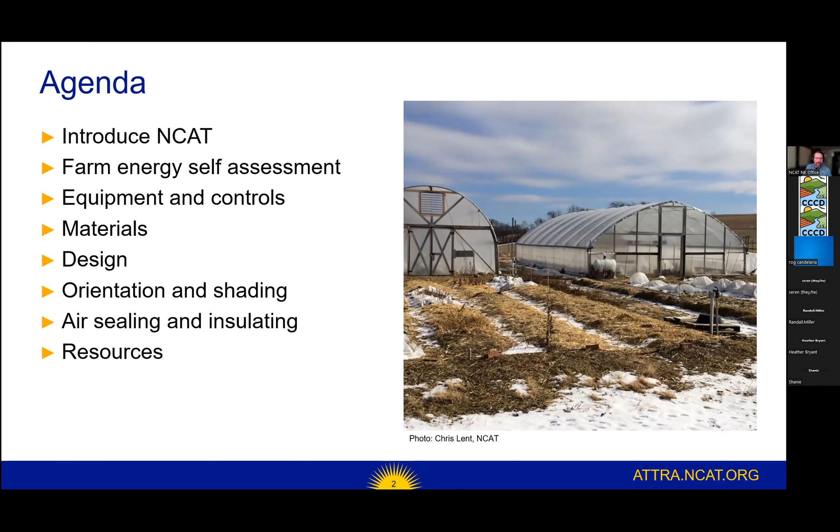And then we'll finish with some air sealing and insulating information for those structures. Throughout, I'm going to have resources for you, hopefully, that you can turn to dig a little bit deeper into the subject matter we're going to be covering. So without waiting here, we're going to go forward to talk just a touch on NCAT.

The National Center for Appropriate Technology was formed back in the late 1970s, so we've been around for quite a while, and we were formed to help folks during the energy crisis of that time. We adopted the principles from the appropriate technology movement, which were small scale, simple, local and low cost, and environmentally sound. We still use those principles in our programming today.

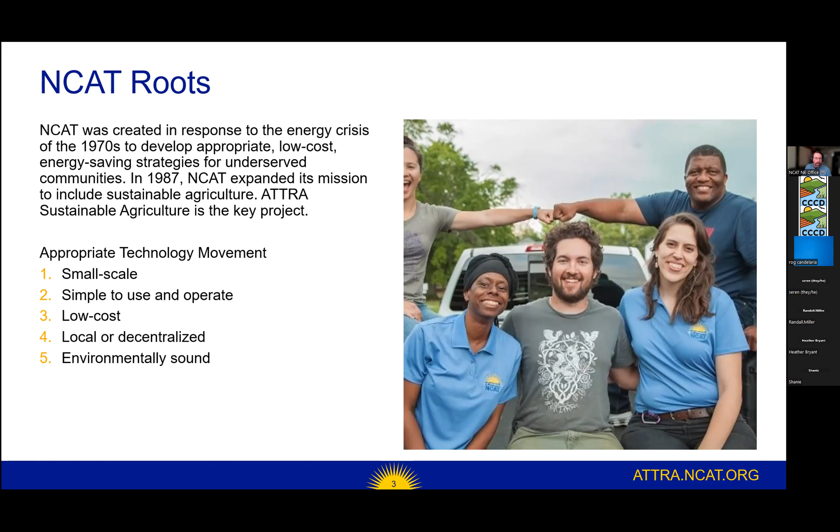There's two main sides to our work at NCAT. One is agriculture, and we do that mostly through our ATTRA project, formed in the mid-'80s. Through ATTRA, we have over 300 publications available. We offer technical assistance from our specialists across the country, one-on-one. There's podcasts, tutorials, video logs, and all types of information on sustainable agriculture subject matter that you can access through our website, which is in the lower corner of the slides. Each slide has our ATTRA website on it.

The other side of what we work on is energy. We do energy audits and energy assistance for folks across the country as well. I'm here to talk about both of those things, bringing them together to talk about energy efficiencies in high tunnels and greenhouses.

What we wanted to target today, or who we wanted to target, were folks who have a smaller diversified vegetable operation and grow some of their own seedling starts in the propagation house. They possibly have a high tunnel or two that's heated, along with a small greenhouse for propagation of seedlings, and maybe to grow some starting plants for other farms in the area. That's kind of how I organized the talk today, around that type of grower. But I think there'll be information in here for those who are bigger than that and those who are smaller.

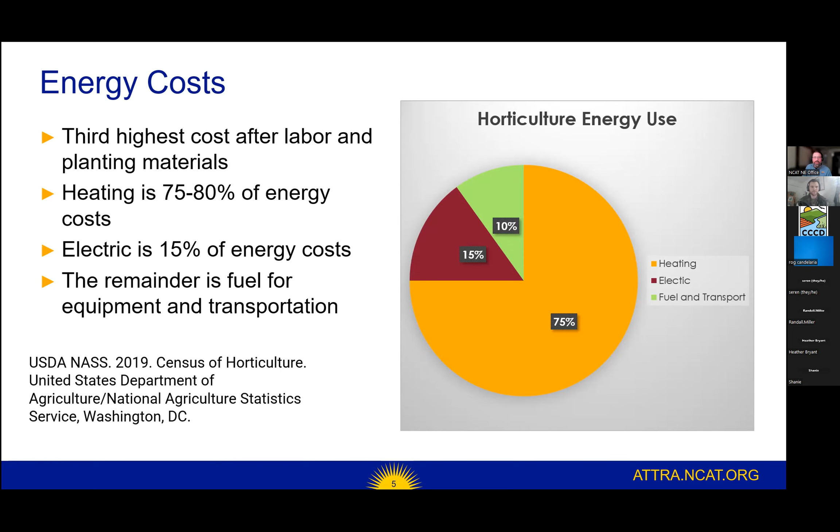There's more energy inputs going into high tunnels than used to go into them in the past. That's why we're starting to focus on energy use more in these structures.

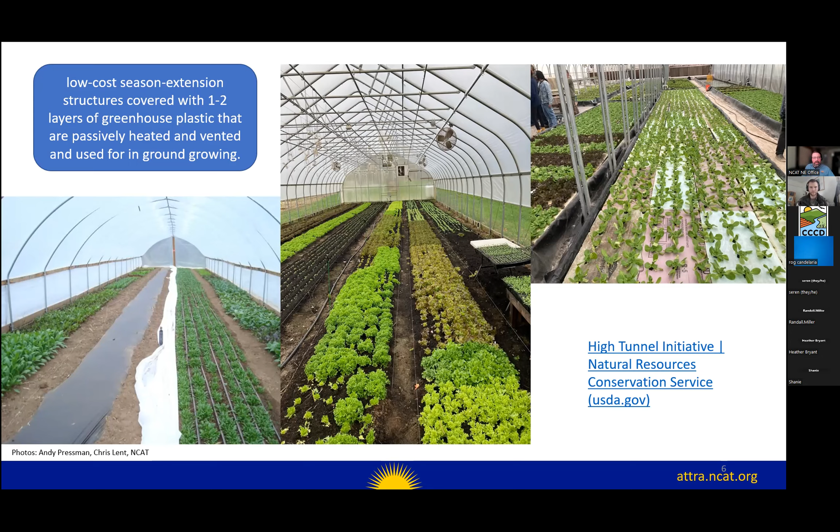I always mention the High Tunnel Initiative from NRCS, the Natural Resources Conservation Service. That's an initiative for helping pay for high tunnels for your farm. There's a link here in the presentation, and also a series of links to resources that Matt is going to drop into the chat that I'll be mentioning and referring to throughout the presentation today, so you'll have access to those.

So why are we looking at the energy issues surrounding these tunnels? Mainly to reduce costs. That's one of the main focuses: identifying energy use and reducing it while improving efficiencies.

You could also use the information you're learning today to prioritize project upgrades on your farm and improve operational efficiencies. That mainly comes into play with more efficient controls of the systems working inside these tunnels, like ventilation and heating systems. If you're controlling them more efficiently, you're saving labor to a large extent, so that's where it could benefit you operationally.

And if you're farming in a sustainable manner, trying to reduce your carbon footprint, this is one way to do that as well, to reduce your energy use. Most likely, if you're using energy, it's coming from a carbon source, and reducing that usage will reduce your carbon footprint.

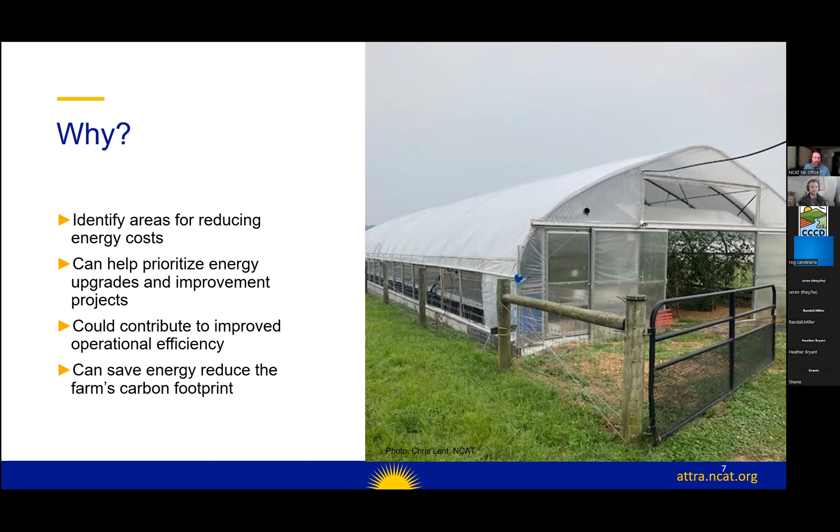I'm going to start by going over this: you can hire an energy assessment of your farm, a professional energy audit, but there's a lot you can do before you have to go that route. You can do a self-energy assessment of your farm.

What that involves is, first, reviewing your electric bill and understanding how it works. Then you want to list the equipment on your farm that's using energy, get a comprehensive list of everything that's using energy, and try to estimate what it's costing you to run that equipment. To do that, you need wattage and run times, estimated run times, and we're going to go over a couple examples of that.

You'll be looking at things like heaters and water pumps, blowers and ventilation systems, the fans for those systems, heat mats, germination chambers—all of those things that use electricity or fuel to some extent. You want to find out what they're using and how much it's costing you to run those things.

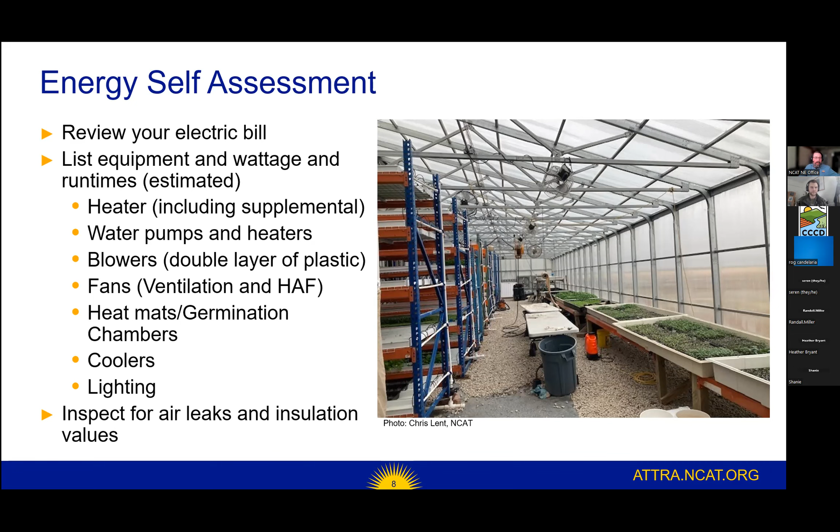And then finally, we're going to talk about inspecting for air leaks and insulation values on the materials you're using to build these structures, high tunnels and greenhouses.

So we'll start with energy bills. I want to go over this as an example of an energy bill. There's a lot of things you can glean from your energy bill: you can see annual highs and lows of usage, do comparisons between years and months of energy use, and also figure out what you're being charged per kilowatt hour—that's an important rate to know.

I want to show you how to figure your real cost per kilowatt hour, which is different than the rate most utility companies tell you you're paying. So I'll point to this—if this laser pointer bothers you in any way, let me know, but I like to highlight things a little bit.

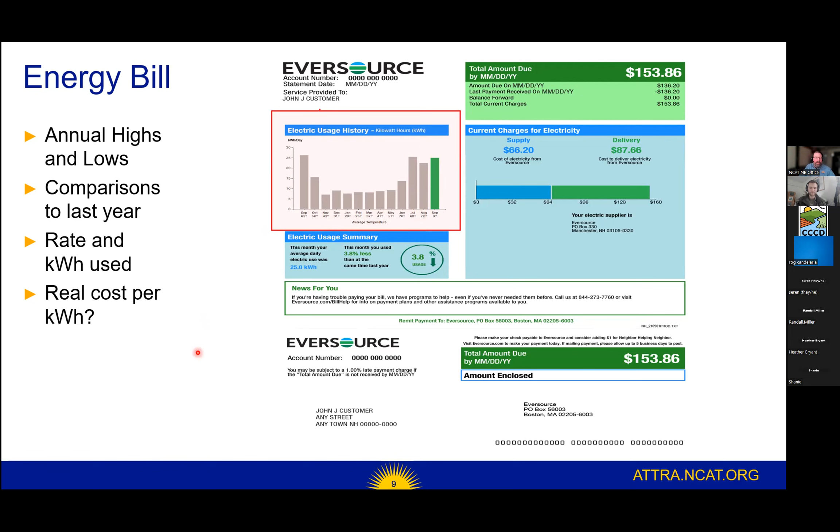So that's useful. On the other half of the bill, the back side, there's a couple more pieces of information I want to point out. It gives you your total usage - on this example, it's 750 kilowatts. It gives you the cycle, so you're on a 30-day cycle on this bill. Most electric utility bills are on a 30-day cycle. It also gives you your rate, which I've circled here in the center.

It's telling us, if you can see that small writing, that they're charging you 8.8 cents a kilowatt hour. So for 750 kilowatts, that's $66.20. But that isn't your bill - your bill is $153 in this example. So you have to take into account all of these delivery charges here.

And that's what I mean when I say the real cost per kilowatt hour. You want to take your total amount due for service during that period and divide it by your total kilowatts used during that period. That'll give you your real rate - I call it the real cost of what you're paying per kilowatt hour.

With that, we can figure out what different equipment is costing you, and we'll give a few examples. Just to be clear, your kilowatt hours can be found here under current usage, and your total charges can be found here at total charges. So you need those two pieces of information to figure out what it's costing you per kilowatt hour.

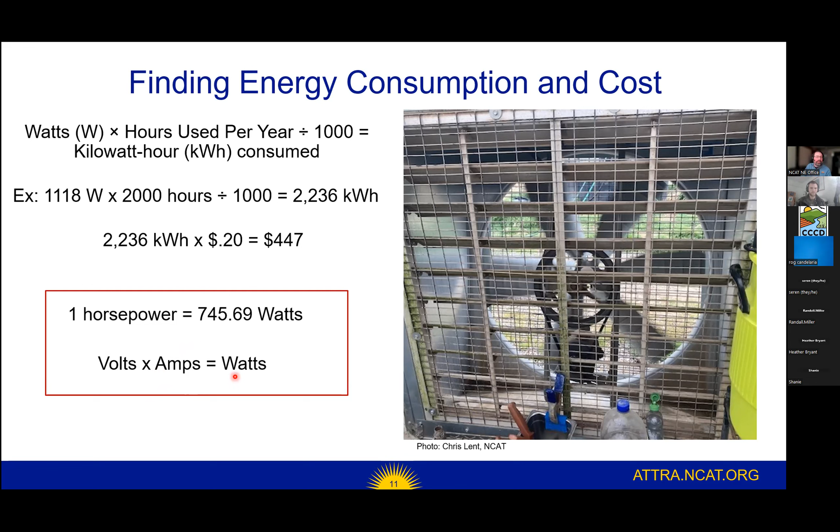So that's how you go through your appliances one by one, list them, and see what things are costing you. It's important to know that. If you can't find a wattage rating on the nameplate of the appliance, you can only find horsepower for instance - then you can use this figure: 1 horsepower equals 745 watts, and you can convert that into watts. If you can only find volts and amps, you can multiply them to find watts, and then continue with the rest of the formula to figure out what it's costing you to run.

You also, on fans and ventilation equipment, you're going to see cubic feet per minute listed. That's an important bit of information to figure out the efficiency of fans.

You're also sometimes going to see on motors horsepower ratings. So I showed you in the last slide how you can use that to get to wattage and figure out how much it's costing you to run a motor like that.

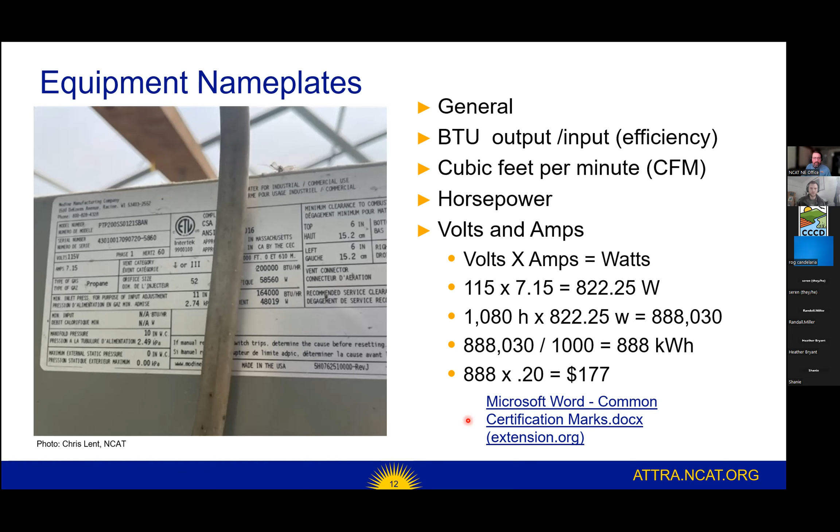You can buy higher efficiency appliances. You can improve the efficiency of the structure, as we're going to talk about later, to reduce the cost of running this equipment. This is a good resource, and it should be in the resources dropped in the chat. This has to do with understanding nameplates on various pieces of equipment and how that information relates to energy usage. So that would be a good one to delve into for a little more information on that.

So if you've got a greenhouse and you're running a heater for long periods of time during the year, there's generally like a 2 to 3 year payback to investing in a higher efficiency heater based on the fuel savings that you'll find.

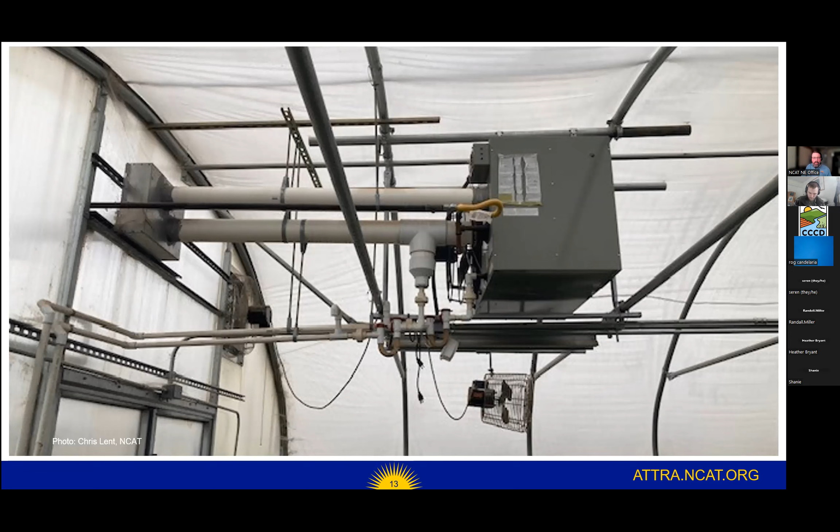So I wanted to show you what a unit like that looked like, and that has to do more with heating. Of course, there's a little bit of electric associated with running these, but that's going to save on your heating costs to a large extent.

So let's talk about some of the other equipment that's used in high tunnels. These are horizontal airflow fans. They're used pretty consistently and ubiquitously to keep the airflow moving inside of the tunnel.

If these are run for a large part of the year, 4 of these fans can easily cost $1,000 a year to run, to operate. So it pays to look at some efficiencies with these fans.

You want to properly size them. The rule of thumb is you want to size them to about twice the area of the space or structure that you're trying to move the air around in. So for example, if you had a 30 by 60 tunnel, you would get the area of the tunnel by multiplying 30 by 60, and you'd times that by 2, and that's the amount of cubic feet per minute that you would want the capacity of the fans to have.

So if you're using 4 fans, you could divide by 4 and have 900 CFM fans, and that would give you a proper size to do the job right without oversizing the fans and using extra electricity.

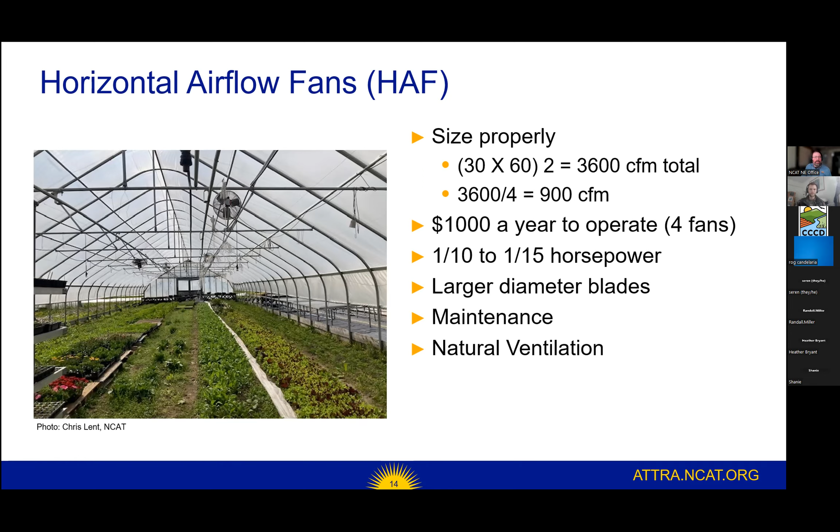And to do that, we use these, what they call squirrel cage blowers. You have to size these properly. These aren't going to cost you a lot of money. They run 24/7, pretty much all year long, but they're still very efficient, and they usually won't cost more than $100 a year to run one of these units.

But it still pays to size them properly, so you're not paying more for them than you'd have to. The general rule of thumb is, if you're trying to inflate a square foot area under 2,400 square feet, you're going to use a 60 CFM blower. If you're going above that threshold of 2,400 square feet, you move up to a 148 CFM blower. Those are the two most common sizes you'll find on the market, so that's why I'm using them as an example.

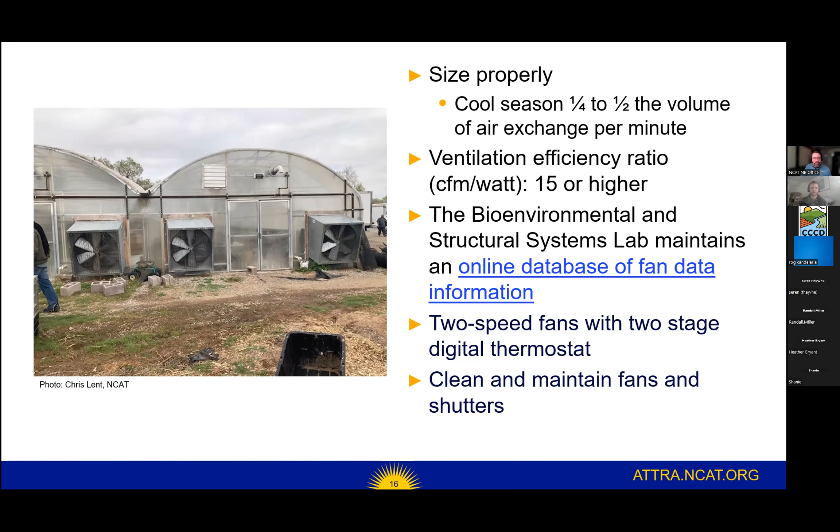So I talked about natural ventilation. The rule of thumb for this is to be effective, you need about 15 to 20% of the square footage that you're trying to ventilate in open space along the sidewalls, that's combined on both sides. And then you need about that same amount in open space as a vent toward the top of the high tunnel. And that's why you see these large gable end vents to try to get natural ventilation going. These are a little undersized, but with the door open and the vent open, there's going to be quite a bit of natural ventilation going on here.

With a little bit of a 1 or 2 mile-an-hour breeze, it can be a really effective way to ventilate. And you can shut your exterior fans off. You can shut your horizontal airflow fans off as well when you have good natural ventilation. In fact, you should shut your horizontal airflow fans off because they interfere with the natural currents that are taking place. Orientation also improves this, and we'll talk about that in a little bit down the road here.

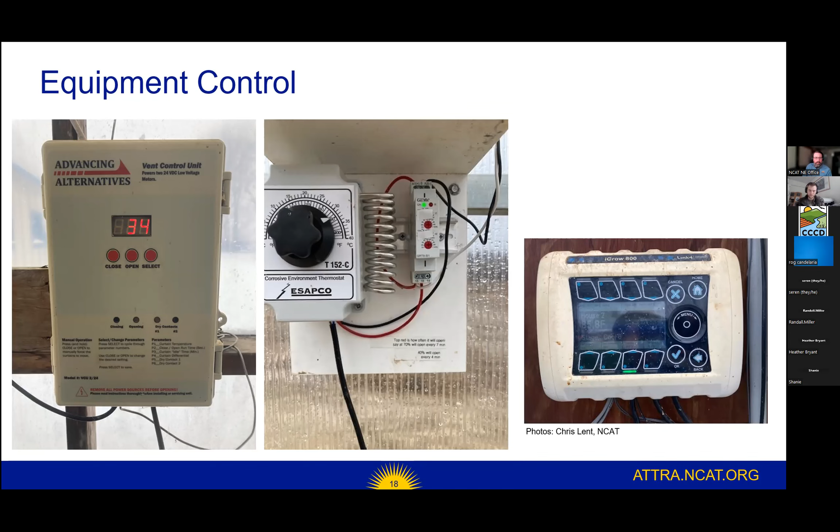So let's talk a bit about materials. The common glazing materials or covering materials for these structures are 6 mil greenhouse plastic, but there's a few treatments for these that are very common now, and I always try to mention them because they're extremely important.

Infrared treatment on the inner layer of plastic is very important, because it prevents infrared radiation from leaving the high tunnel at night. In a heated tunnel or greenhouse situation, this alone can save about 20% of the cost of heating, so that's a very important energy saving treatment. The anti-condensate treatment prevents condensation from forming and staying on the inside layer of the plastic. If you have enough condensation, it'll block sunlight and reduce the heat gain, and you have to make up that heat gain with added energy inputs, meaning your heater has to run longer. So those two treatments are extremely important.

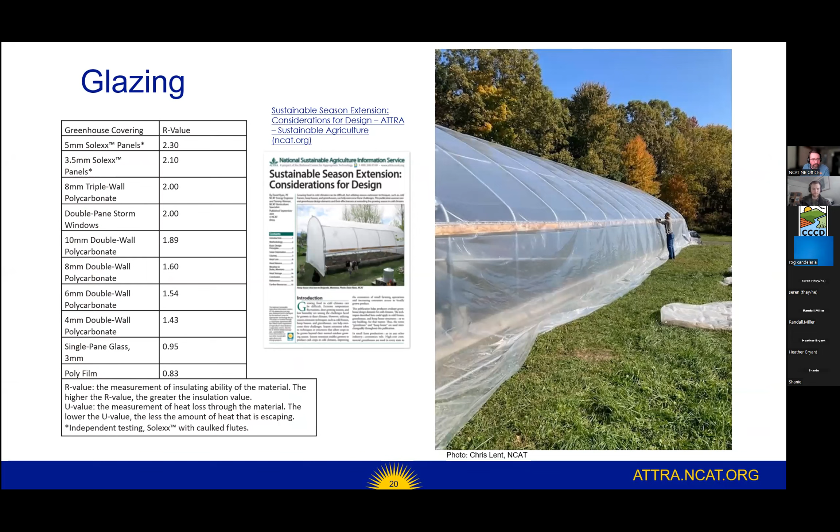Now, this is an older drawing, and I realize it's not the neatest in the world, but the work that Steve Moore did here in Pennsylvania years ago—he was working with unheated tunnels, but he was able to put efficiencies into them that improved growing conditions. As you see here, he got plus 22 degrees over nighttime minimums inside these beds. So anytime you can improve efficiencies in the high tunnel to reduce the amount of heat you have to put in, I think it's worth looking at.

What he was doing here is sidewall insulation with rigid insulation board. He also buried insulation board on a slant around the perimeter of the tunnel, and put insulation underneath the walkways—you see a small area there insulated. He doesn't draw it here, but there are 2 layers of plastic with air blown in between. He's also covering these beds with some type of thermal covering, either row cover or old greenhouse plastic, which he liked to use. That's how he was getting those efficiencies inside the high tunnel.

So it's worth doing these things, because if you're getting those kinds of temperature increases over your nighttime minimums, you're going to need a lot less heat input if you're heating a tunnel to keep things above freezing, for instance. That heater is going to turn on a lot less frequently if you have these types of efficiencies in your tunnel.

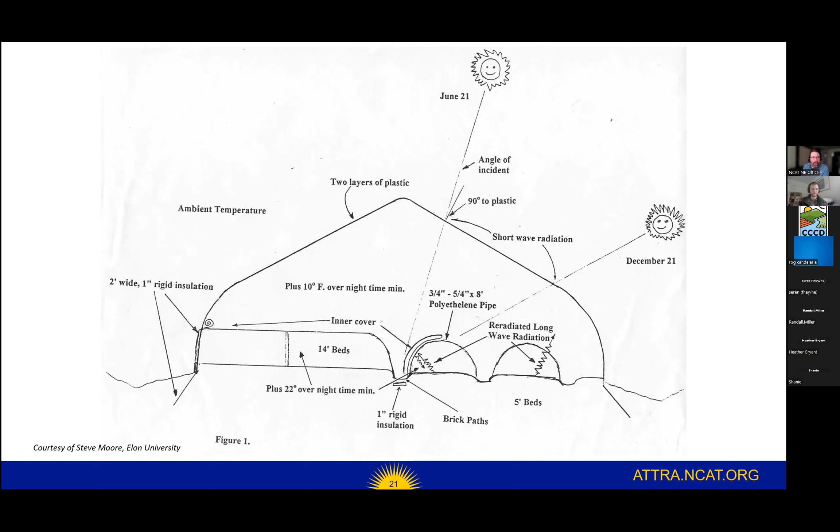As far as greenhouse efficiencies, there are certain things you can do there too, and insulation comes into play here as well. Orientation is also important, and I'll have a visual for that in a minute. You want to get as much heat gain from the sun as possible, so orientation matters, and you don't want any shade for the same reason.

Of course, that double layer of inflated plastic is very important. You can see it here in this picture as the plastic kind of billows in between the ribs. That's 8 or 10 inches of dead airspace providing insulation inside this greenhouse.

This greenhouse happens to be at Dog Days Farm up in New Hampshire, and as part of the series we're going to have a field day there at the end of March, I believe the 26th, where we'll talk about these same issues and see some of them in action on his farm. So keep that in mind.

You also want to right size your greenhouse space. You don't want to be heating space that you're not using, that's what that comes down to. You want it well drained because if you have water flowing through, it's going to pull heat out of the tunnel, and you're going to make that up with heating energy input.

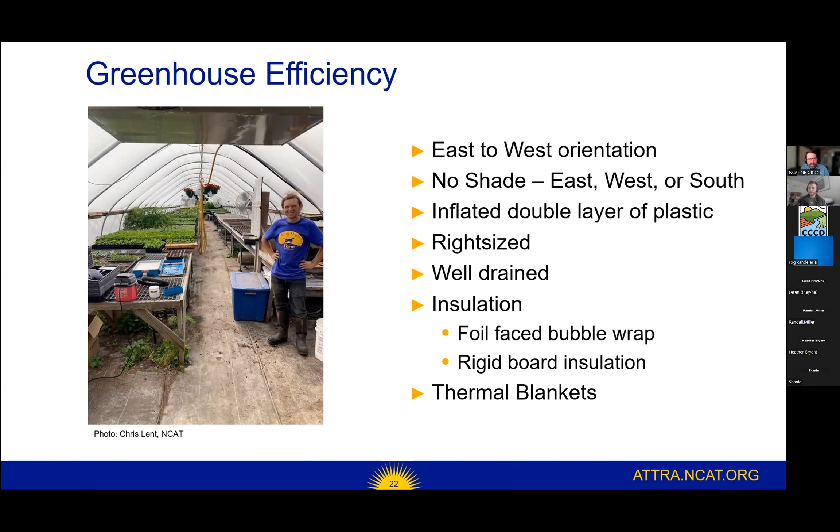Thermal blankets I'm mentioning, but they're mainly sold for larger scale greenhouse production systems, and that's what the blankets and systems on the market are for. I haven't seen effective systems for this size greenhouse. I think they would help tremendously if it could be done, but it increases labor because they have to be rolled back every day. So practically speaking, they're not really there yet, but I look forward to seeing some innovation in that realm on the smaller greenhouse production scale.

This was my seedling house when I was growing, and it's not the neatest or best example, but I was trying to show here that with this plastic draped, I would close it up in the early part of the season and cut my greenhouse space in half, so I was only heating half the space.

Then as I progressed into warmer days and needed less heat but more space to expand, I would open them up and use the expanded space. I was also trying to use vertical space here, hanging shelves so I could utilize the vertical space in the structure and get more bang for my buck, so to speak.

And I had the inflated two layers of plastic, but it wasn't inflated to the degree it needed to be. I was getting about 4, maybe 6 inches in there, and you really need 8 or 10 inches or better to get that R 1.5 over the whole structure.

Let's see, I'm at about 45 minutes.

I mentioned this hydronic floor and bench heating because it can help make a greenhouse production system more efficient to heat with hydronic heating right under the bench or under the floor. I'm sorry the picture isn't better, but this is a hydronic system back here with a propane water heater, and these are tubes going under this mat. There will be trays of flowers or plants sitting on this floor and being heated from below.

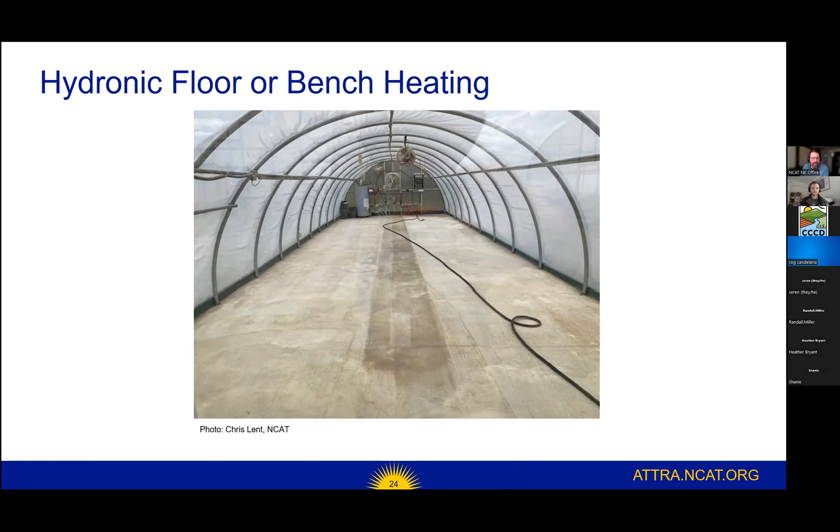For every degree you reduce the temperature, you save about 3% in energy costs, so that can be an effective way to reduce your energy use. Some of that goes into heating the water, but hydronic heating is more efficient, so you end up with a net positive of energy savings.

Here's the orientation I was talking about. In the Northeast, or the northern part of the country, you'd want to go east to west on the long axis of the high tunnel if you're doing year-round production. That gives you, in winter, a large section of the high tunnel facing due south. You can think of that as a large solar collector, so you want that facing due south.

You can see the solar panel here facing the same direction. That's why I thought that was a good example. That orientation gives you the maximum heat gain you can get for that structure.

The other reason to run it that way is that if predominant winds are from the west or northwest, it creates a vacuum on the east gable vent that helps with natural ventilation. So for those two reasons, it's best for energy reduction to run it that way.

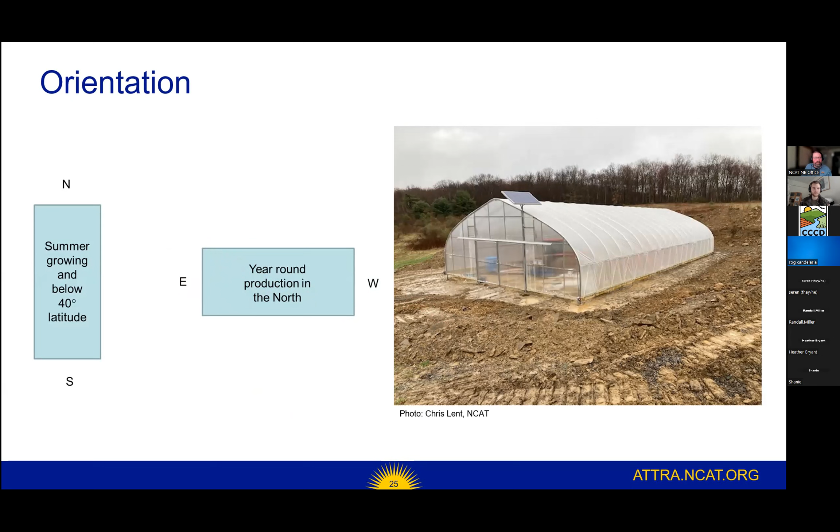I'm not going to spend much time here, but it's important not to have shading on your structure, for the reasons I've already said about making the sun's heat gain as efficient as possible. There's a good fact sheet that'll be in the chat among the links we're posting on how to site a greenhouse to receive the most sun.

So if you're looking to put up a high tunnel or greenhouse structure, make sure you know there won't be any shading.

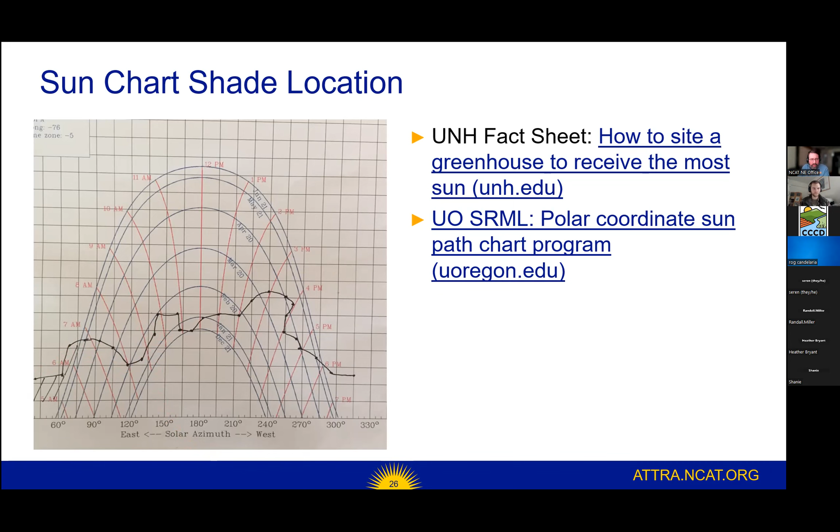As far as construction and being airtight, just like any heated structure, you want your structure fairly well sealed. That means a very airtight connection of plastic to the pipes and to the baseboard on the end walls. With polycarbonate, make sure there are no gaps behind it if you're putting polycarbonate or another material on the end walls.

This is a good example. It's a very tight foundation. The doors and windows here are very well sealed, very tight, and the plastic is tight to the last bow. There are a few things you can do to increase that air tightness.

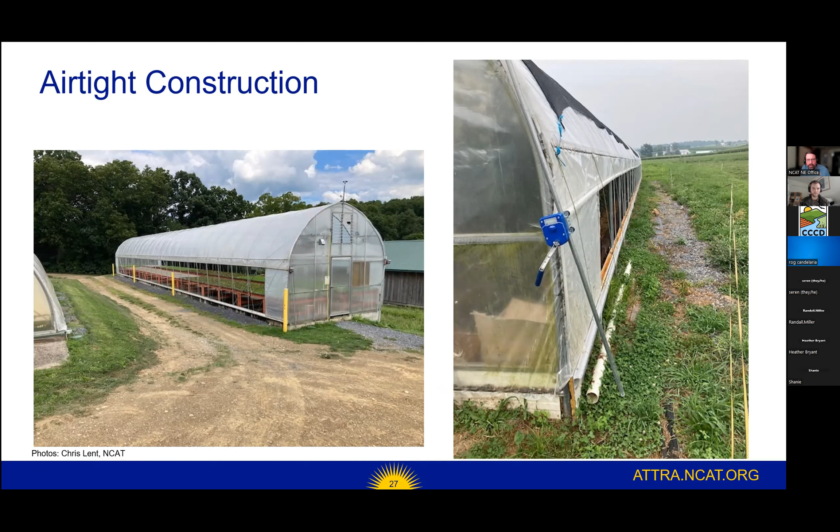In the winter, when you close up the tunnel or greenhouse and get ready to heat it, you can use wiggle wire channel along the bottom edge of your sidewalls and up the edge of the sidewalls to lock that plastic into place.

You can do the same thing around shutters like this. This isn't actually with the plastic in place, but for a shutter similar to this, you could put wiggle wire channel around it and wiggle a piece of plastic over it.

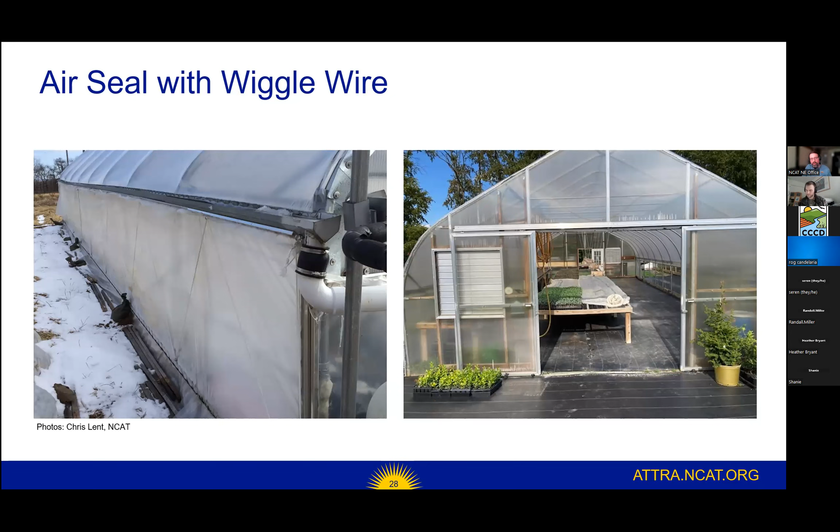If you need to remove your plastic more frequently for ventilation, you could buy heavy duty exterior Velcro in 2-inch wide strips, about $1 a foot. If you put a strip of Velcro around the opening and the opposite strip on a piece of plastic, you can quickly cover up your exterior openings. When you need to ventilate, you can quickly pull them off, ventilate, and put them back on. It's a good way to cover any leaky doors, windows, or shutters in these structures.

Around the baseboard is another weak spot for air infiltration. This is me putting metal sheeting, or aluminum flashing, around the base of my high tunnel. It's not the neatest job, I'll admit, but the idea is you don't want an airspace between the ground and the baseboard. If the ground isn't burying that, you'll get a lot of air infiltration underneath the baseboard. This is a way to avoid that.

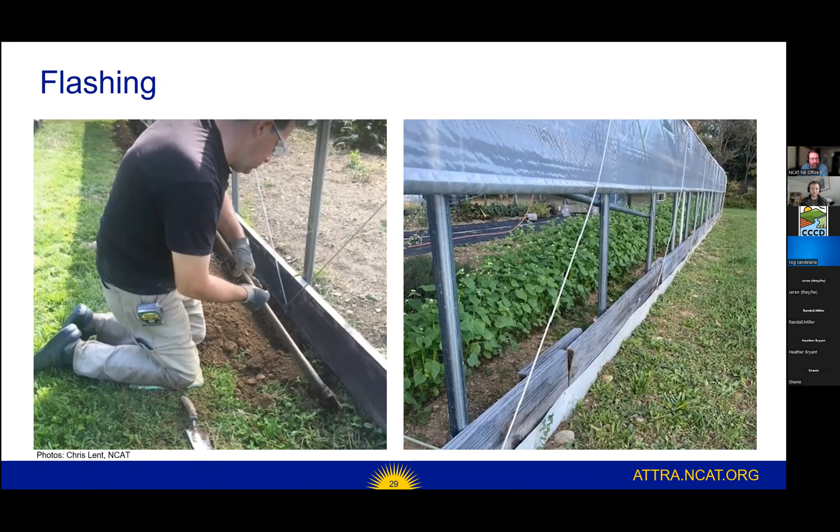Look for these types of gaps behind your polycarbonate. There's about a quarter-inch gap here that you can see behind your wiggle wire channel. You can put foam seal behind there, a very inexpensive product contractors call sill plate seal. It's rolls of foam that you can cut into strips and put behind your material, and it takes up that gap and takes care of those air gaps. So that's tightening up a structure.

I know there was a lot covered there, and there was a lot I didn't get to in this subject, but I want to give you some resources that we have as well.

As far as renewables and energy efficiency funding sources, I always mention the REAP program, the USDA REAP, which is Rural Energy for America Program, run by USDA's Rural Development. That's a grant funding source for energy efficiency measures and alternative energy projects for farms and rural businesses. They will currently pay up to 50% in grant funding for on-farm energy efficiency or alternative energy projects.

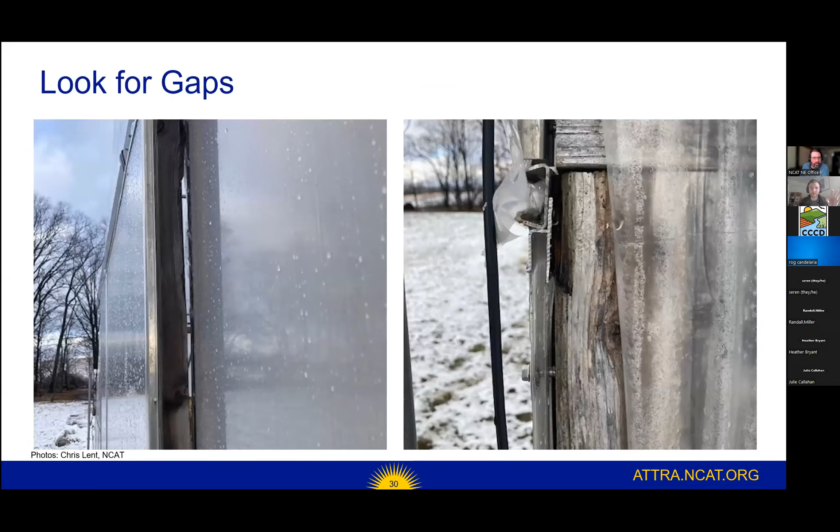Raj asks, what distance ought there be between the layers of plastic? I think you answered that later in the presentation and said 8 inches, correct? 8 to 10 inches, I think, is what you're shooting for. That requires you putting on the outside layer a little looser than you would think you needed to.

He also asked, if temp is right, how and why is CFM for airflow important? Is CFM dependent on temperature? I'm wondering if that's for all the ventilation of the entire tunnel you're asking. Raj, if you're here, would you want to speak up and clarify? Yeah, I'm just trying to see if your temperature is okay, how important is the airflow. Well, the airflow - there are two things you're trying to control inside the structures: temperature and humidity levels too. Usually humidity is controlled along with temperature, because as your temperatures are dealt with, you're also moving air through the structure and getting rid of humidity. So it's most of the time dealt with at the same time. But if you're at your set temperature, you don't need it - your fans will shut off after you hit that set temperature.